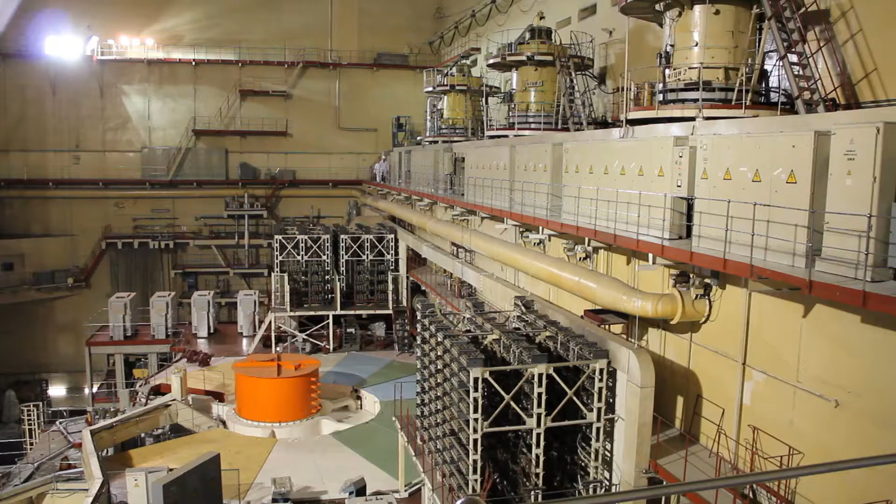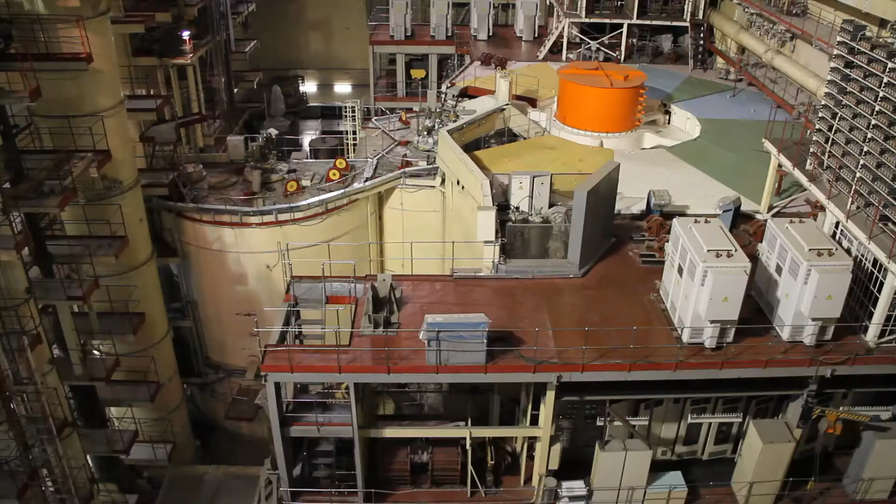The only fast neutron reactor power unit of 600 megawatt commercial power in the world has been operating at Beloyarsk NPP for more than 30 years. By the technical parameters, this reactor meets all the present-day reliability and safety requirements and features the property of inherent safety. The latter is characterized by the following: the intrinsic proofness of the reactor core due to the natural physical properties, the negative reactivity effect in all the operating conditions, the absence of xenon poisoning, and the high stability of the neutron field.

At the design stage, it was already clear that the BN600 power unit number 3 would be characterized by the properties of natural inherent self-proofness. Namely, these are feedbacks. All the reactivity effects at all the power levels are negative. Moreover, the power density field is very stable and uniform. The pressure inside the reactor vessel is also nearly atmospheric. That is to say, the vessel is unloaded.

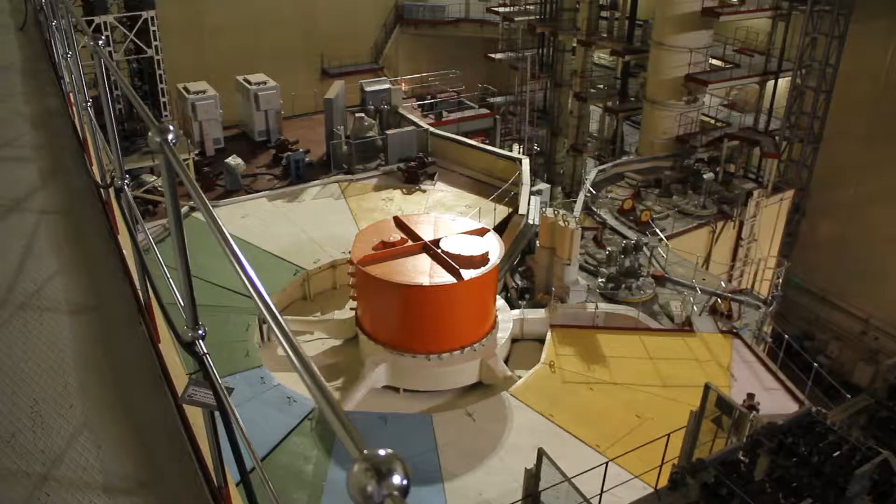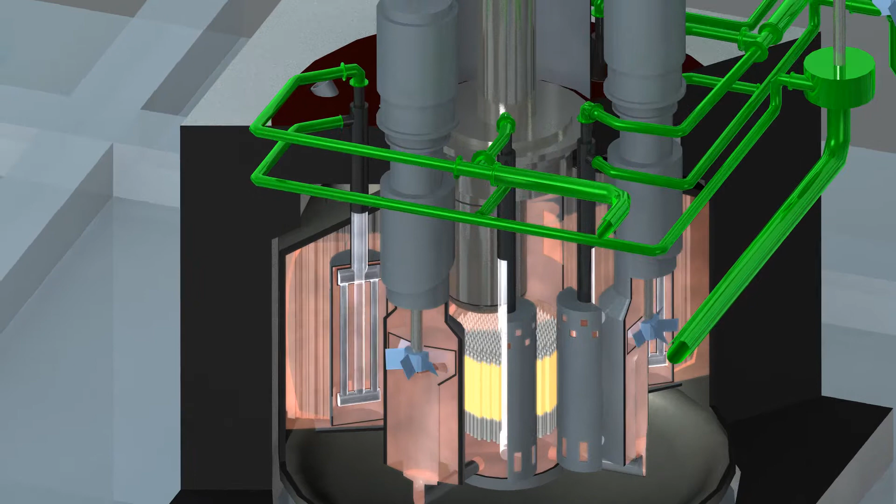Graphically, the operation of the fast reactor looks like the following. Power unit number 3 consists of the sodium-cooled BN600 reactor, staged steam generators, and turbo generator sets from which thermal and electrical power is delivered to consumers. The reactor vessel is a cylindrical tank. The main vessel is enclosed within a guard vessel, precluding sodium leaking from the reactor into the pit if the integrity is lost.

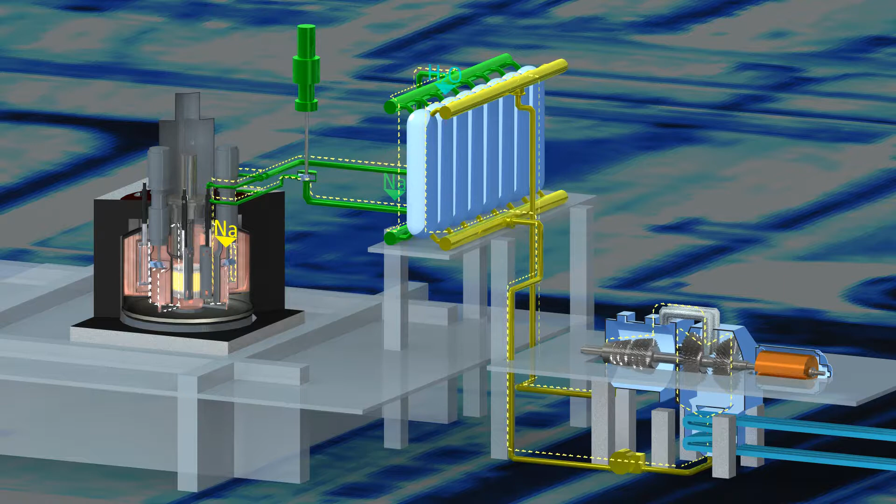The heat transfer system consists of 3 parallel heat transfer loops independent of each other, each in turn consisting of 3 consecutive circuits. The coolant of the primary and secondary circuits of each loop is a liquid metal, namely sodium. The coolant of the tertiary circuit is water and steam. The 3-circuit heat transfer system precludes the release of radioactive matter from the primary circuit into the water-steam circuit.

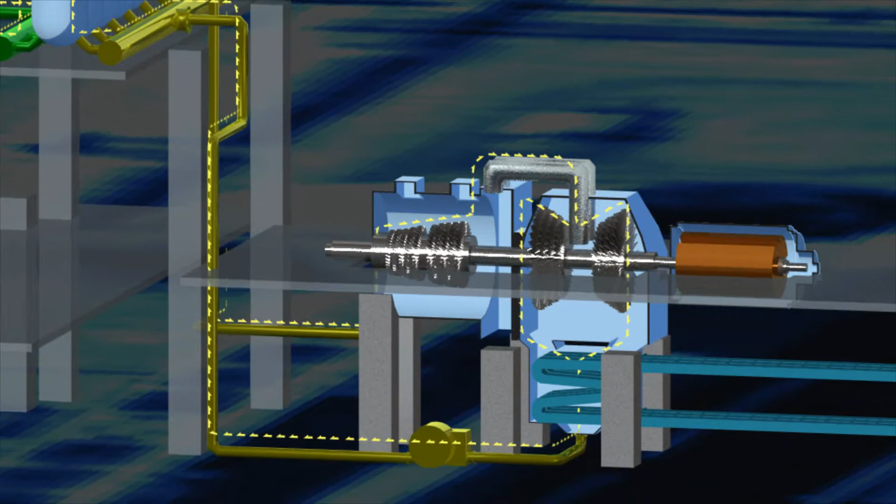In addition, the high thermal inertia of the coolant, which is sodium, and its low corrosion activity with respect to the structural materials can be mentioned. All the above confirms that the BN600 reactor features a high degree of safety. The rated lifetime of the power unit as planned by the designer was up to 2010.

Since 2003, a large scope of work has been carried out to provide for the lifetime extension of power unit number 3. The work on safety improvement and power unit efficiency enhancement has been fulfilled. The work resulted in obtaining the license for additional operation of power unit number 3. The license was obtained for operation up to 2020.

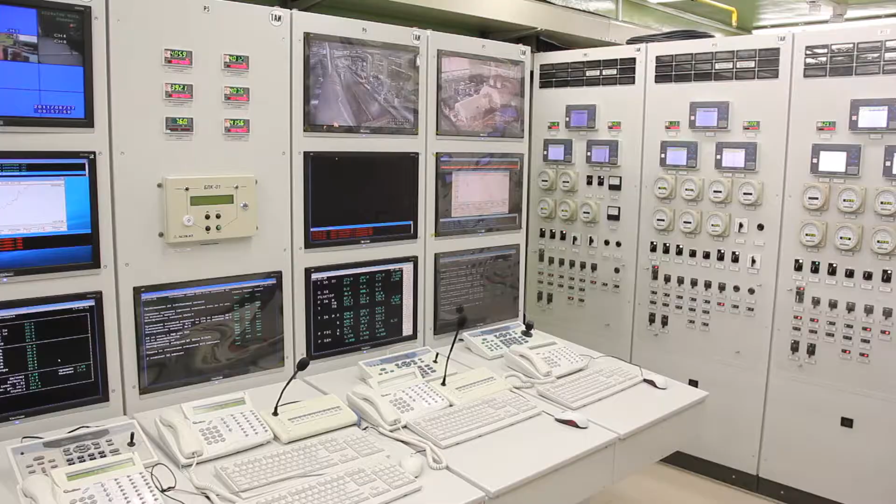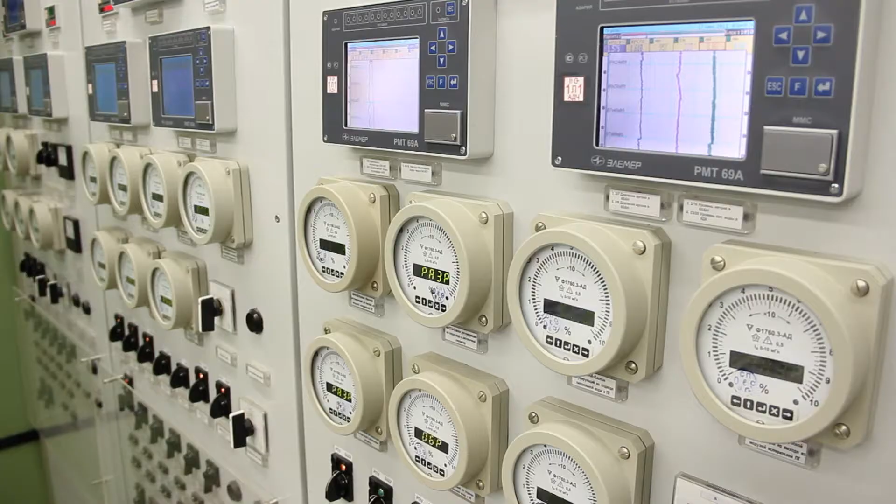As a result of the completed innovations, the power unit corresponds to all present-day world concepts of NPP safety provision. In the course of the upgrade, the emergency reactor console, initially unforeseen by the designer but required by present-day norms and rules, was installed and put into operation at the Beloyarsk NPP. The emergency control console means the possibility of taking the reactor subcritical, keeping it subcritical for a long time and removing the decay heat.

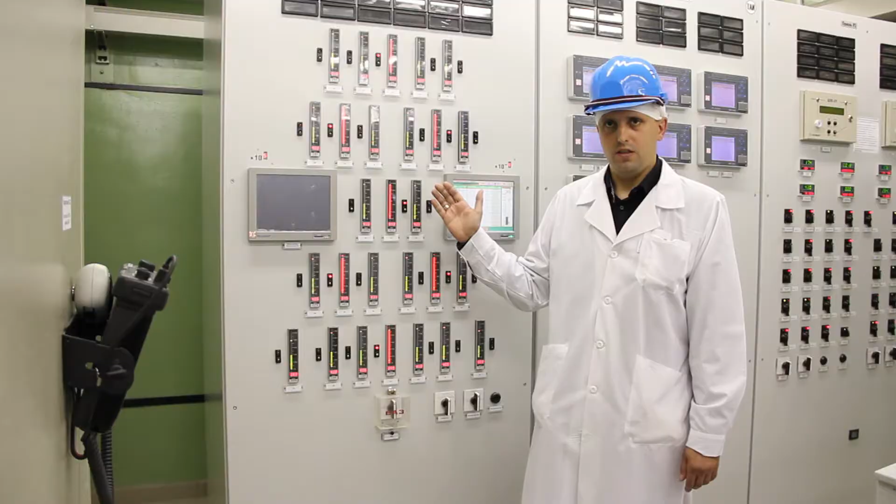From here, the situation can be monitored in every room of the unit as well. The establishment of the unit control console is one of the most important steps towards unit safety provision. The operator can monitor the position of the control rods. If worst comes to worst, take the reactor subcritical using the scram key.

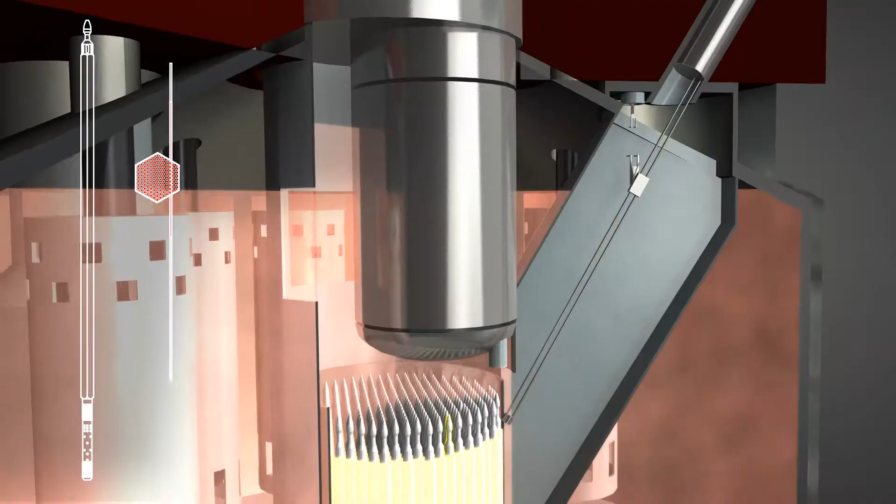One of the most important reactor components is the refueling system. It provides for the loading of fresh fuel subassemblies and control rods into the reactor and their unloading after irradiation, as well as the reshuffling and turning of the subassemblies in the core. During the upgrade, the new refueling control system was developed at Beloyarsk NPP, which improved the accuracy and reliability of operations performed with the nuclear fuel, automated the refueling process, and ruled out potential wrong actions by operators.

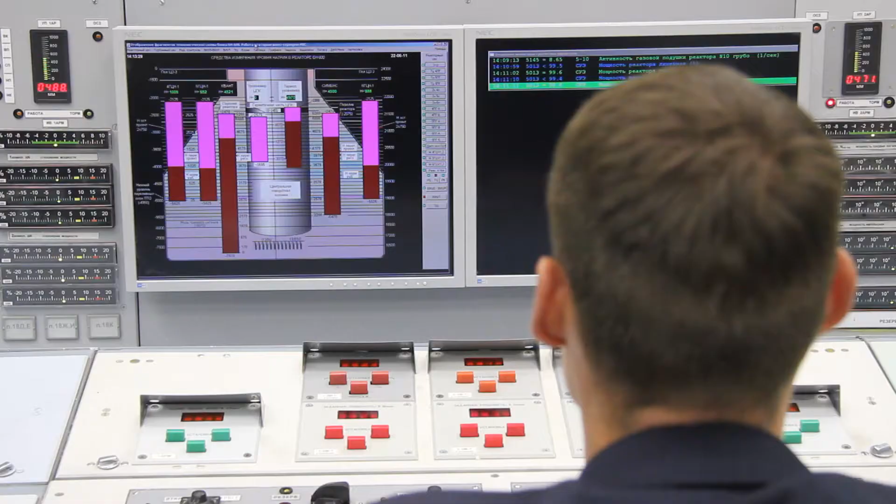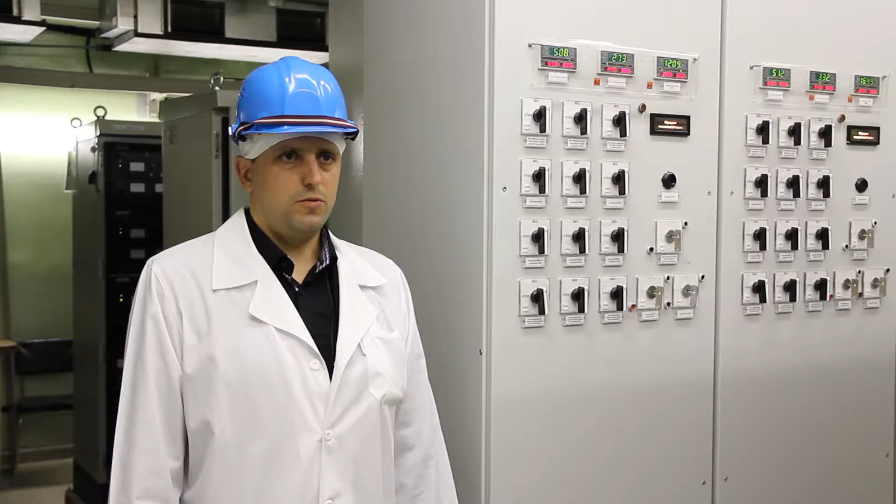In total, the upgrade program cost Beloyarsk NPP nearly 8 billion rubles. It is impossible to enumerate all the upgrades. Hereinafter, we indicate only some innovation phases. The second independent emergency protection set was developed at Beloyarsk NPP Power Unit 3. For the time being, we are in the area of the second emergency protection set, which fulfills the function of reactor emergency shutdown when the parameters reach the predetermined levels.

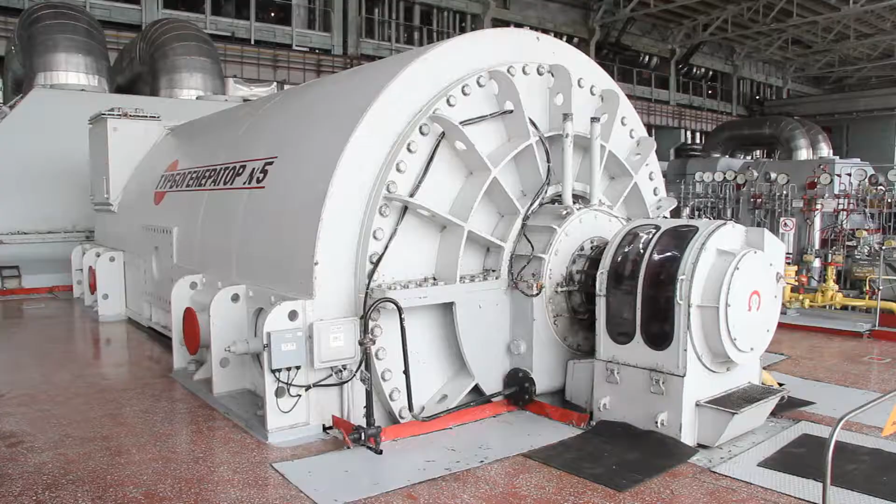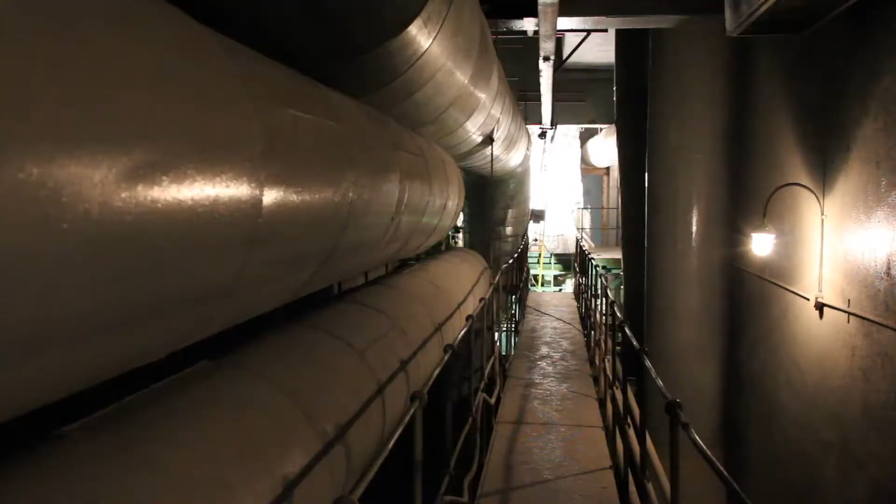For several recent years at Beloyarsk NPP, 2 existing emergency power supply channels have been retrofitted, and the third channel has been developed. Of the redundant power supply systems, independent of each other, there are now 3. The equipment and the power unit buildings have been brought to the aseismic condition. The new automatic seismic protection system ensures instantaneous power unit shutdown in case of an earthquake of grade 5 or more.

A dedicated ventilation system for air cleaning during possible sodium burning using a multi-cyclone collector has been developed. The additional system of emergency reactor heat removal based on the air heat exchanger, which will decrease the probability of severe consequences during potential accidents by another order, is under development.

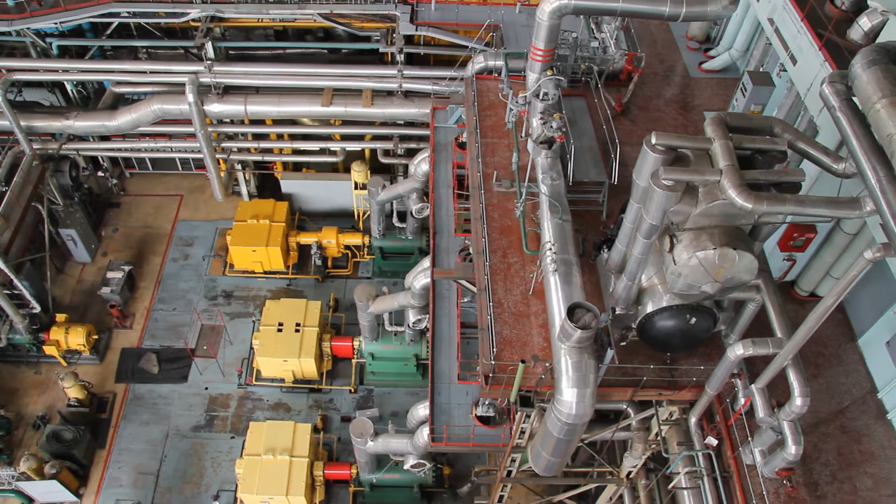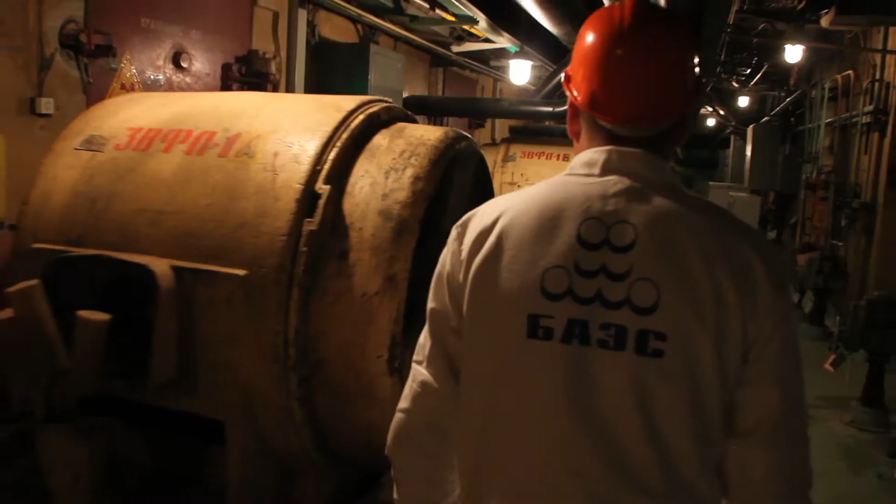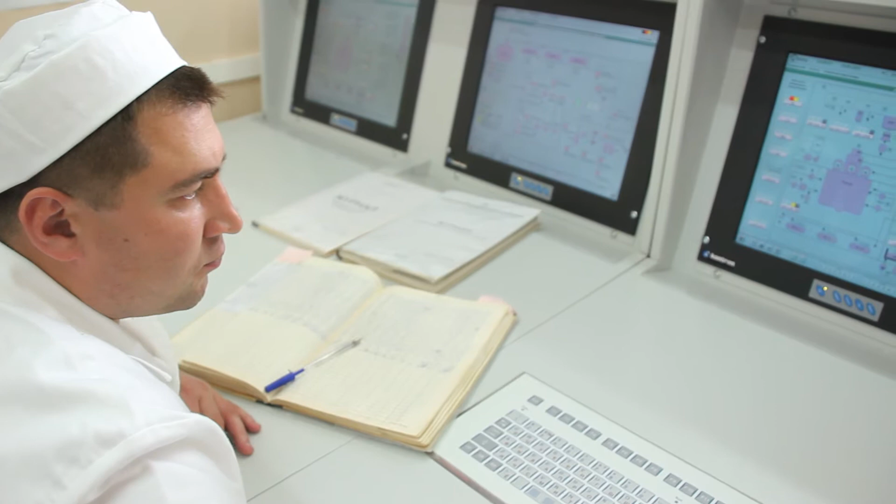The radiation monitoring system of Beloyarsk NPP Power Unit 3 underwent considerable innovative modifications as well. The installed state-of-the-art digital instrumentation ensures complete and instantaneous information on the radiation situation of the entire NPP site, which arrives at the radiation monitoring room. Individual radiation monitoring is an important part of the personal safety culture of the nuclear power plant personnel.

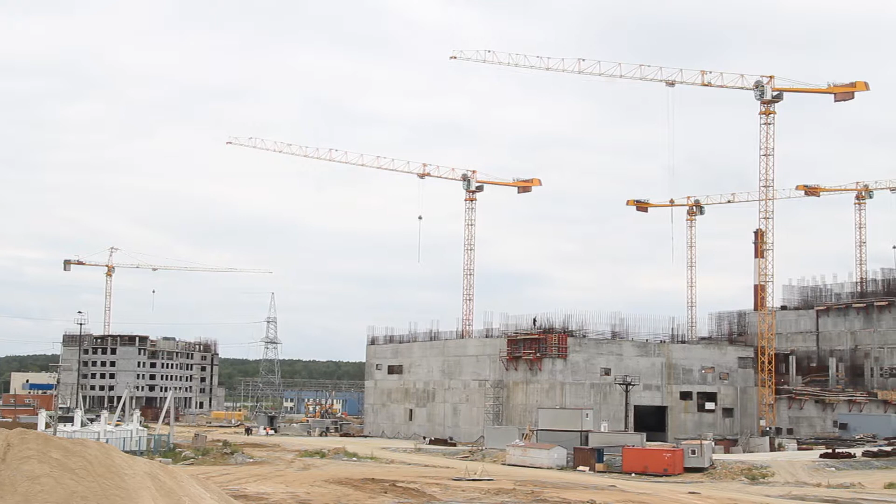The development of the engineering solutions verified in the BN600 reactor, reliably operating for more than 3 decades, is implemented in the Beloyarsk NPP BN800 reactor under construction. The erection of the new generation fast neutron reactor will allow a number of the most important tasks for both the Ural region and the Russian nuclear industry to be solved. Today, state-of-the-art technologies make nuclear power plant operation stable, safe for human beings and the environment, and as efficient as possible.